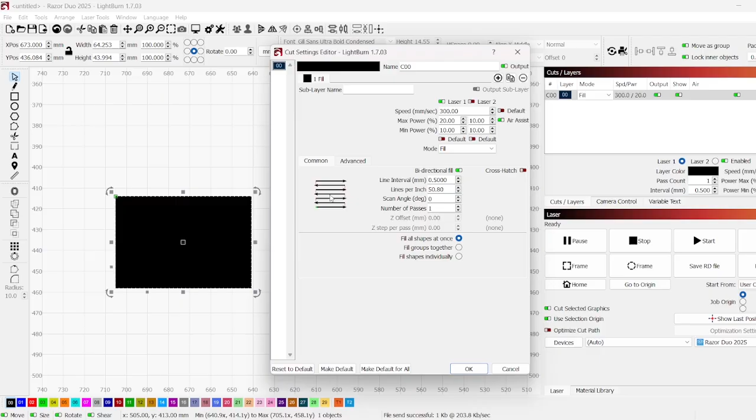So we go into LightBurn and enable bidirectional fill. That's now going to enable us to turn on our laser from right to left as well. Now you might notice that my lines don't perfectly match up—they're staggered, right? This is what happens in a real world scenario without offsets enabled or offsets that need to be adjusted.

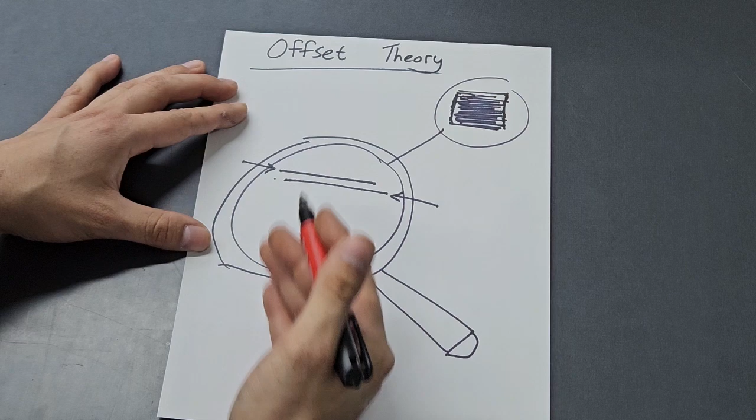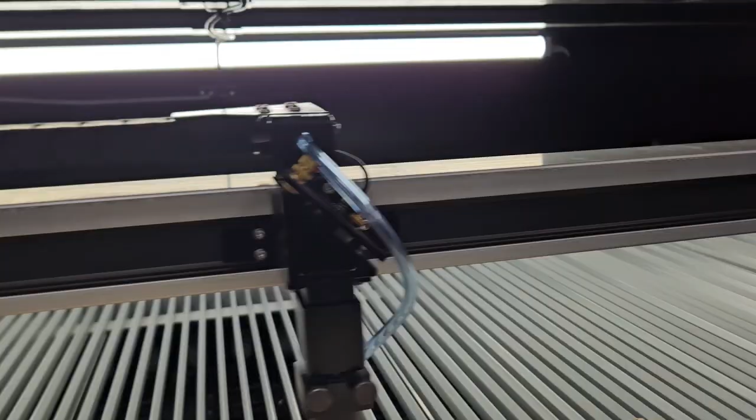So say I'm engraving this square at 1,000 millimeters per second. The gantry speeds up, it's at 1,000 millimeters per second, and then it hits my end mark, and then it has to slow down and quickly turn around as fast as possible, and then also go 1,000 millimeters per second. Acceleration, deceleration, all that back and forth on a pulley and belt system—there's going to be some mechanical lag. That's why there's going to be this offset.

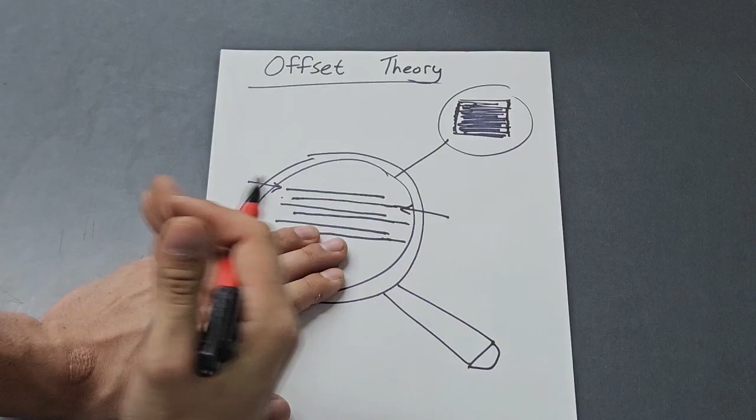This line shift, or the staggeredness of the lines, is going to be a lot more prominent at higher speeds than at lower speeds, just because the gantry doesn't have to move back and forth so quickly. Now luckily, LightBurn has a feature where you can enter an offset to get rid of this little distance between those lines, called our line shift.

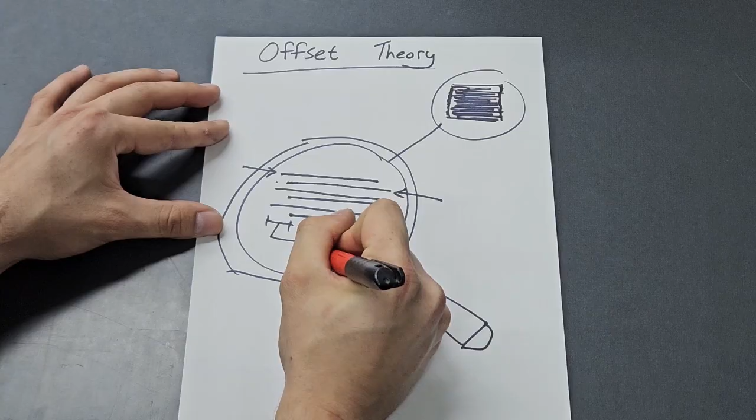That means if I enter an offset in, that's not just going to affect my right to left, it's going to affect my left to right line as well. They're both going to shift at the same time. Now that can be troublesome if you just enter numbers and everything moves around. Just remember that offset you put in for your line shift is going to affect both lines.

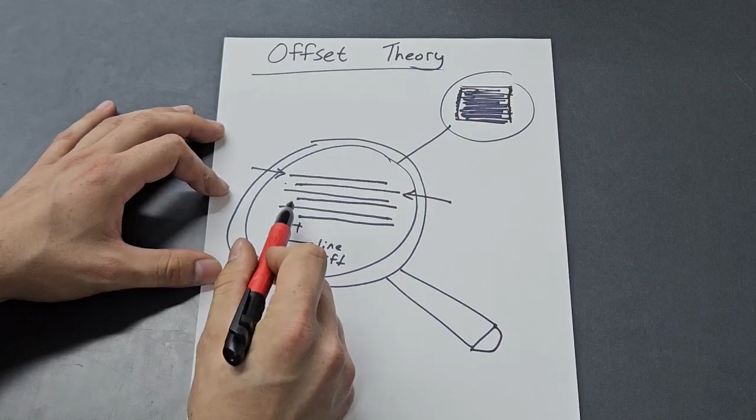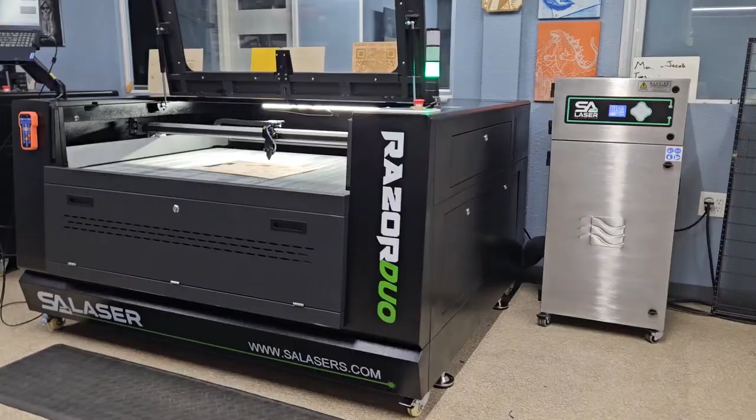The machine we'll be using today is our Razor Duo, which has the dual sources, glass tube and RF, in case we want to swap over to the RF with a much smaller dot size and get really fine engravings. The method I'm about to show you works with either offsets already on your computer that you just want to adjust, or no offsets at all, and we're going to start from fresh.

To even get to offsets in LightBurn, you want to navigate up to the top and click your device settings. That's going to be the wrench and screwdriver icon. It's going to be under basic settings and right down in the bottom left hand corner.

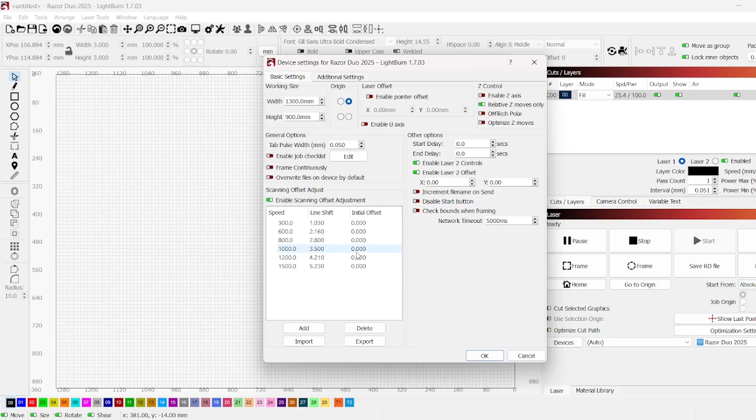Now I'm doing this in LightBurn 1.7.03. LightBurn 2.0 and beyond looks a little bit different with the ability to put in an offset for two lasers, so that works perfectly for a machine like us with those two laser sources that need different offsets, because one fires a whole lot faster than the other. So like I said before, I work better when there aren't any offsets at all and I can set it up however I want.

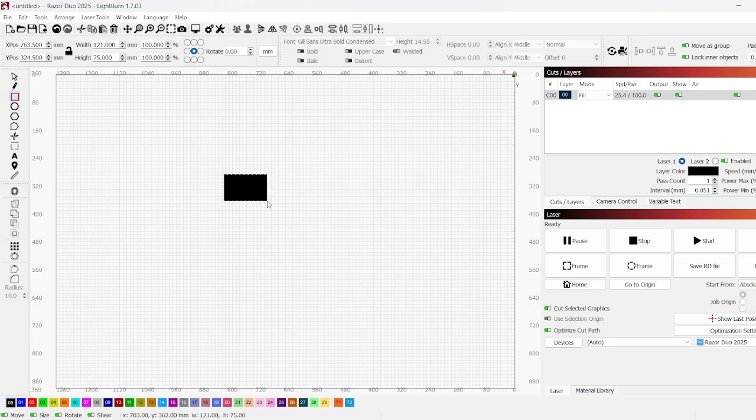So I'm going to go ahead and delete my current existing offsets, and we're going to start fresh. We're going to exit out of this and make a little square. We'll make sure that square is in fill mode, go into that layer, and change the line interval to something like 0.5. That's going to increase our spacing between lines significantly, so it makes the measurements a lot easier to take.

Now I'm going to run this on a 130 watt glass tube, so adjust your power accordingly. The speed you're going to put in is the speed for the offset you want to adjust. If you have an existing offset, say 600, put 600 in, take measurements and adjust that. But if you don't have an offset, select whatever speed you most commonly use for your engraving work. For example, a lot of people engrave tumbler cups at 550 millimeters per second, so for fine tuning that exact speed, you'd put in 550 millimeters per second.

Now let's say I do a lot of engravings on this specific type of wood at 300 millimeters per second. Since I do that speed so commonly, I'm going to adjust my offset specifically at that speed. We'll throw in 300. All right, let's go ahead and frame and engrave.

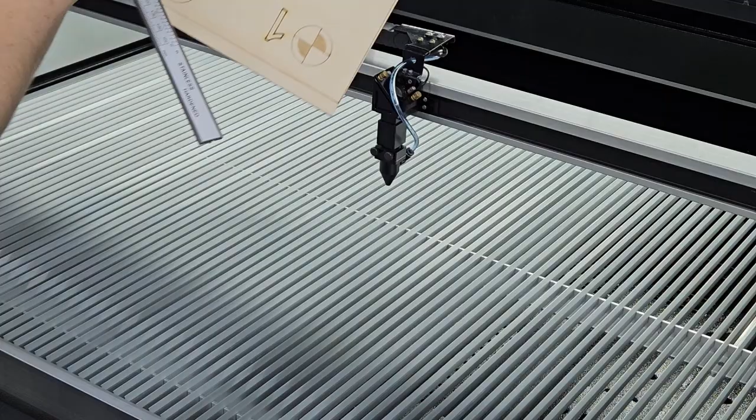Perfect. Now that it's done engraving, what we want to do is specifically look at those lines. Look, they are staggered like what we covered in our theory. Perfect, that's what we want.

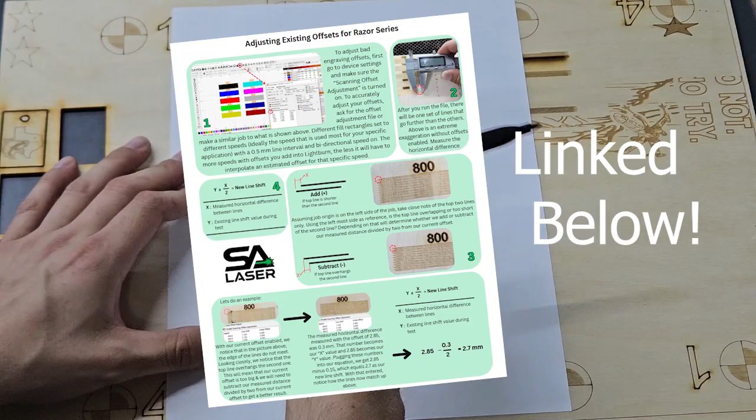Sorry, another illustration, but there will be a much prettier version of what I'm going to cover down in the description on a downloadable PDF. Okay, so this is the gist of everything to do with offsets. Either you have to adjust your offsets because there's a staggered line, or we just shut them off completely or deleted them and we're starting fresh.

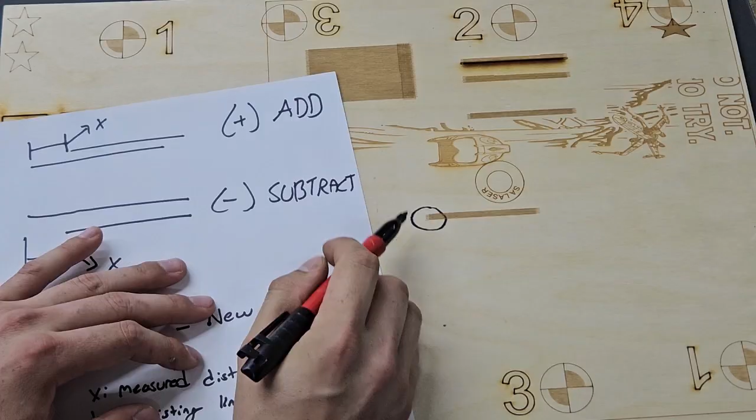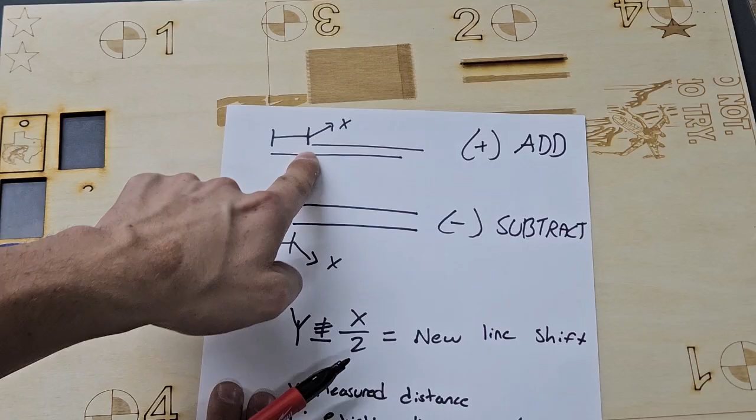Now, what I just did right here, there are some staggered lines. All we're looking at is the first top two staggered lines, and it's going to look something like this. Those top two staggered lines, either the top one is going to be way off to the right, or it's going to be covering the bottom line like this. It's either going to be a roof or it's going to be a stair step, right?

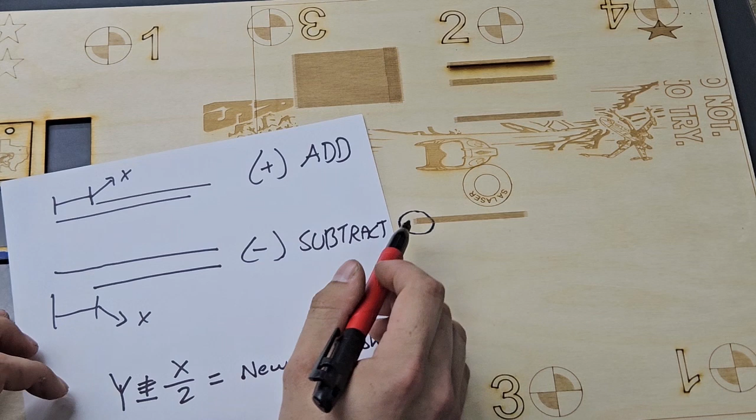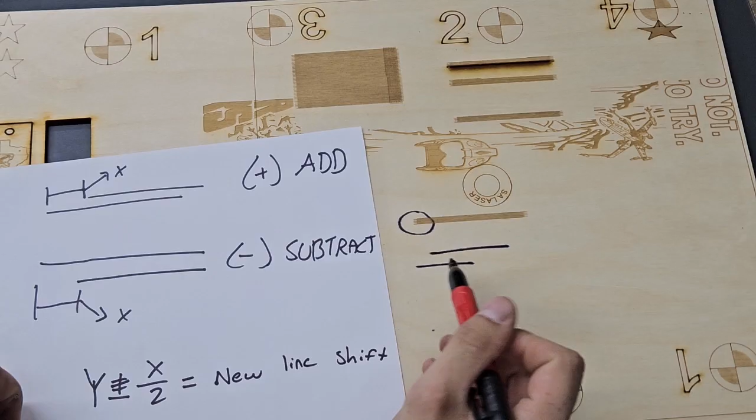Now, in my case, since I turned the offsets off, it's going to be a little stair step, and I'll draw a much bigger example here. This is what my first top two lines look like. So since my top two lines look like a stair step, the top line is off to the right, bottom line is off to the left. That closely resembles my stair step, not my roof where the top line is over on the left-hand side.

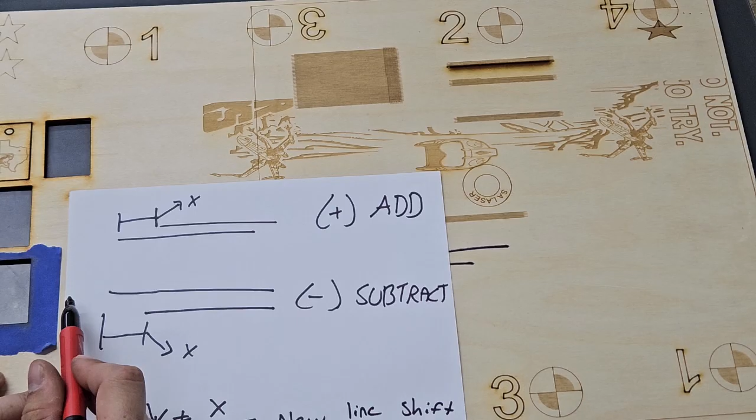So what we're going to want to do is add. Now keep that in the back of your head. We're going to go down here to our equation. It's going to be y plus or minus x divided by 2, and that's going to be our new line shift. Now, y is the existing line shift, so for those of you who have an existing offset you want to adjust, this is where that comes into play. It might be 1 point blah, blah, blah. We're going to either add if it looks like the stair step, or subtract if it looks like the roof. Add or subtract x divided by 2.

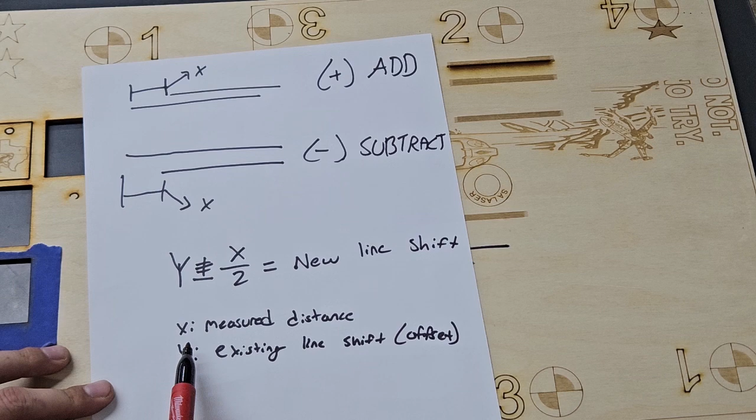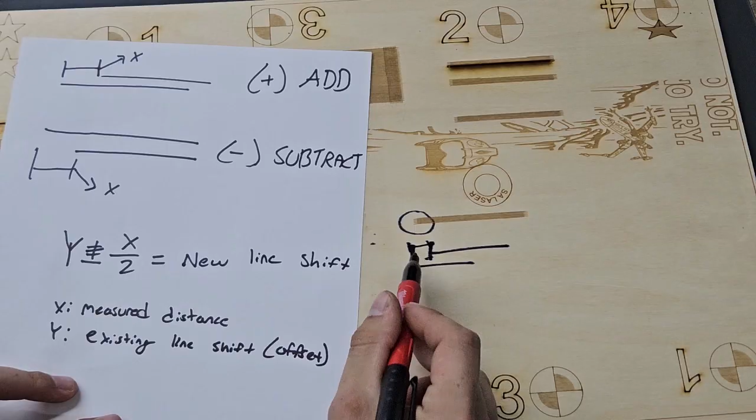X is going to be that measured distance. So we're going to get some calipers or a really small ruler and measure that distance. We're looking at the horizontal distance from here to there. That measurement we're going to divide by 2 and either add for stair step or subtract for roof, and that will be our new line shift that we'll enter into Lightburn, and then we'll redo our results and see what we get.

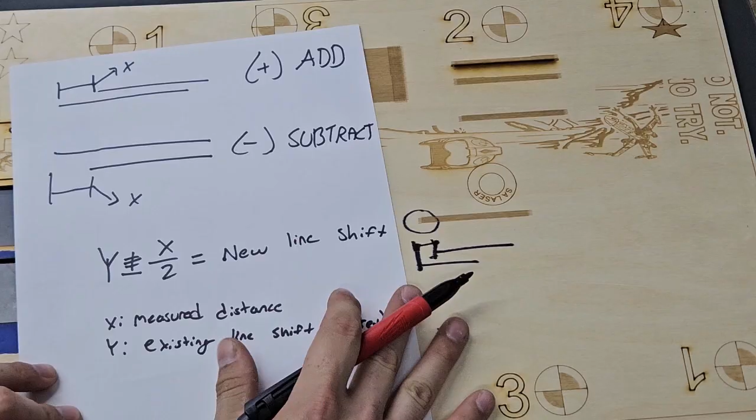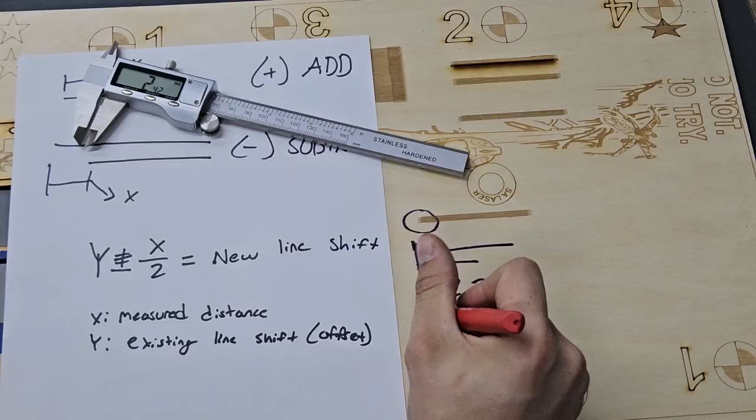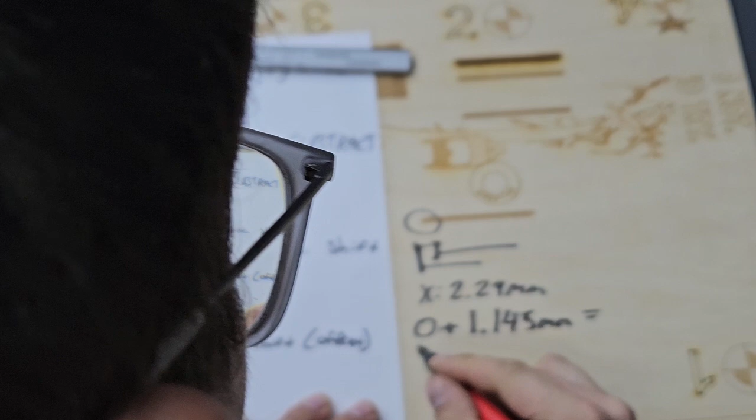Okay, so my X is going to be 2.29 millimeters. Now looking at our equation, our Y is going to be 0 because I deleted our offsets. Plus, right, because I have to add, my top two lines look like a staircase. We're going to add 2.29 divided by 2. I had to throw that in the calculator real quick, which is going to be 1.145 millimeters, to a grand total of, well, that plus 0 is just going to be our 1.145 millimeter offset. Let's go ahead and plug this into Lightburn and then redo that same exact test right next to it and compare the difference.

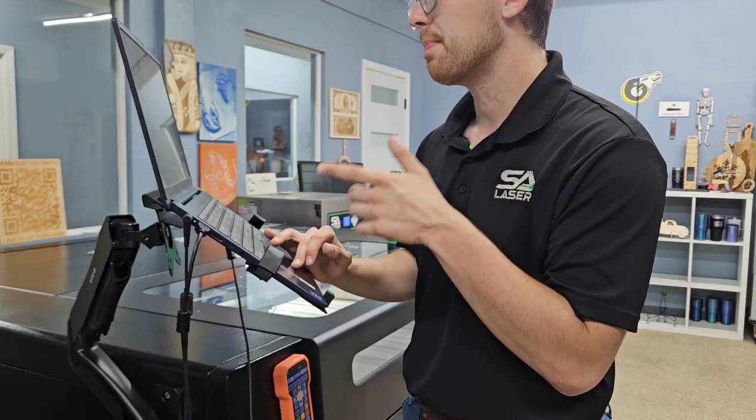Now, if you're unfamiliar with inputting offsets into Lightburn, let's walk through it. We're going to go, once again, device settings up at the top, basic settings, and then our bottom left-hand corner. Now, I did it without offsets in there, so just make sure that enable scanning offset adjustment is on for when we test it again. We're going to come down here to add. This is how we add it in.

Now, I just did my offset test at 300 millimeters per second because that's what I'm going to be running most of my stuff at. So let's go ahead and put 300 in, and then my line shift is what we calculated to be 1.145. We're gonna hit okay, awesome.

And if I want this offset in another machine, so more so if you have like 5 different offsets, all you have to do is hit export. It's going to save it as a Lightburn offset file, and then you can import it into your other computer without having to retype all those numbers over and over again if you have a bunch of them.

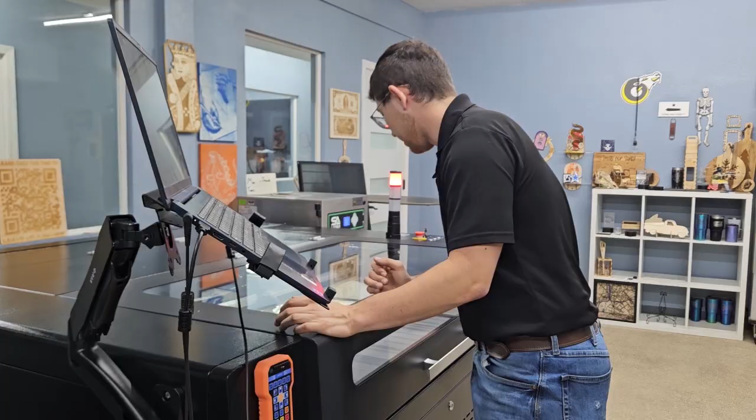We'll hit OK, and then let's go ahead and redo that test. Oh yeah, okay, so that looks significantly better all the way from over here.

Cool, so we reran that test, and if you look really closely, you can see that it's still a little bit off, and the reason being, I did that out of focus. Make sure you are in focus, but since we were out of focus originally, our number is going to be a little bit off. So now I can go through what would happen if you did the measurement and it wasn't correct, or it still has jagged lines. How would you adjust that?

We're going to do the same exact thing, and then we're going to go into the offsets again and just change that number. And that's the whole process of just adjusting from existing offsets.

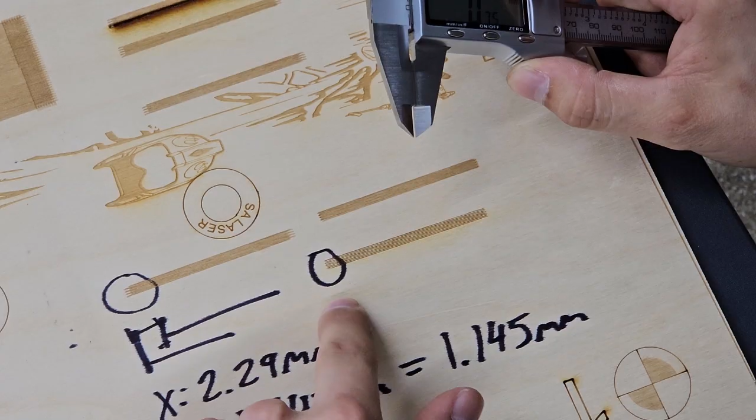Now we're going to do the same exact thing we did before. However, this is why I usually opt to turn my offsets off or just completely get rid of them, because these lines are significantly harder to line up or see. And of course, you could also increase your spacing between each line. It doesn't matter, I just use 0.5 line interval as an example. You can make that much bigger if needed.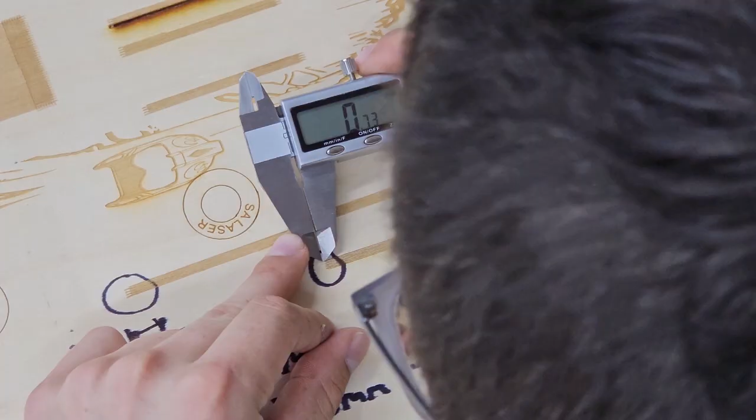But now I'm going to try and do my best to measure this X, my horizontal line, which is going to be about 0.7 millimeters. So just like we had before, my X is going to be 0.73 millimeters. Cool. So we're going to use our Y. Our Y is going to be 1.145, and we're going to look at those top two lines.

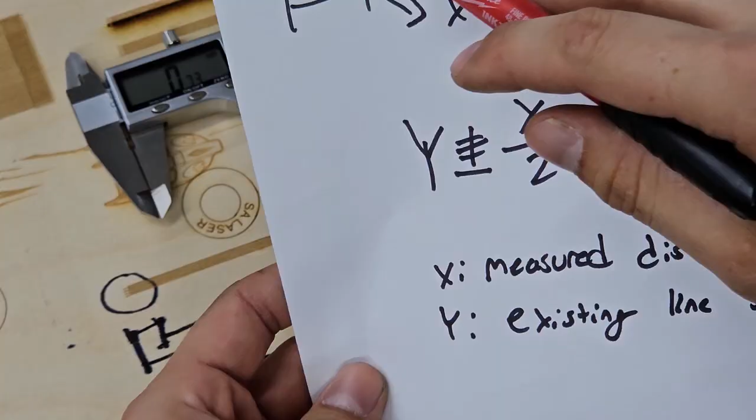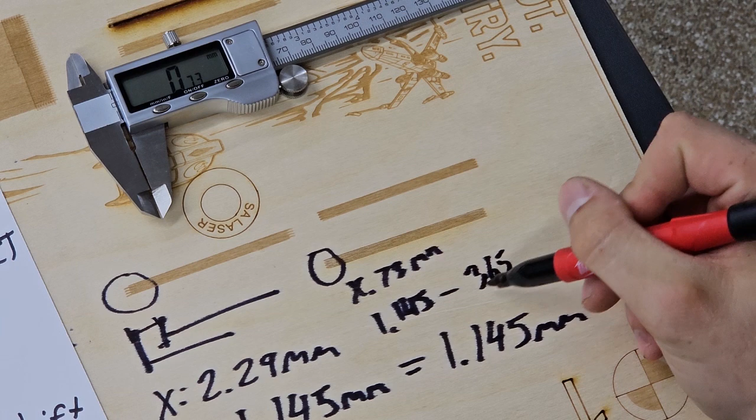Now we're going to want to look at our little handy dandy chart. Is this a roof, or a staircase? And it's actually a roof. The top line is going to be overhanging far over to the left, so we're going to want to subtract. So it's going to be 1.145 minus 0.73 divided by 2, which is going to be 365. Total of 0.78. With it back in, let's go ahead and adjust the offsets.

We're going to go back into device settings. We're going to go down to the bottom to that 300 that we just did, 300, 1.145. We know that that's a little bit too big. We're going to decrease it to 0.78 and hit OK. And that's all it takes to just adjust your offsets. That easy. We're going to go ahead and frame and then redo the line.

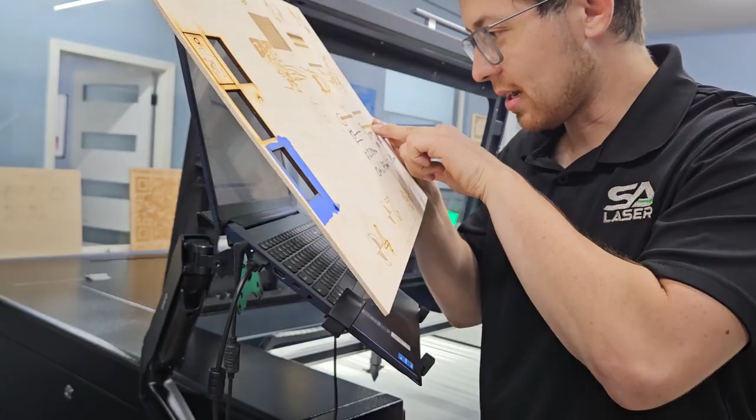And then this is where the scary part happens. It gets really hard to tell. Once the lines are right on top of each other, it's really hard to tell if they're off at all or if your eyes are just playing tricks on you. So this is up to user discretion. You can keep trying to go back and forth and adjust it even more if need be, but once it's right on top of each other, that's pretty good.

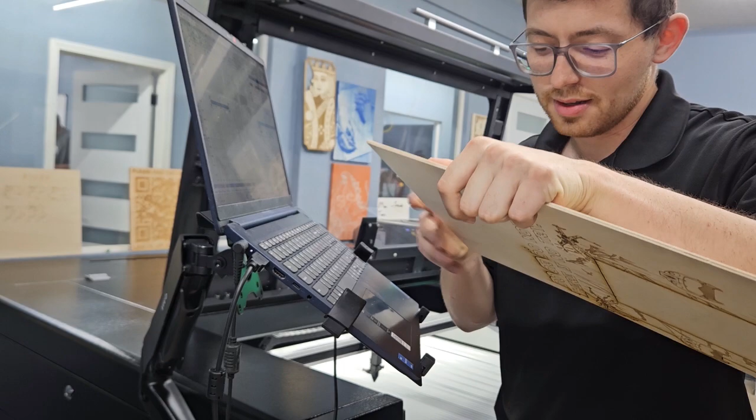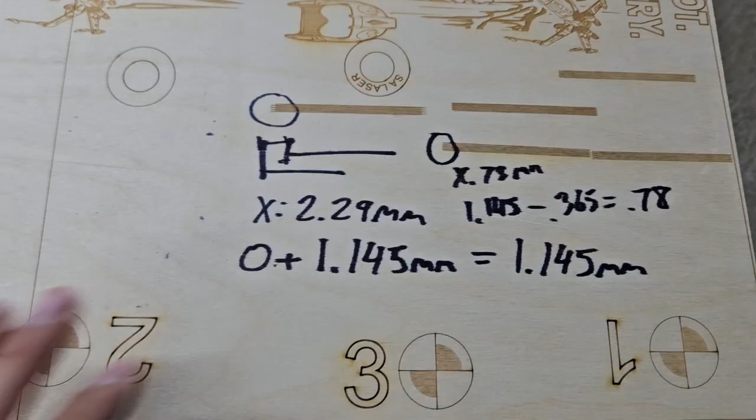So just an overall recap, we started out with lines looking like that with no offsets, right? And then we ended up with something like this, where the lines are right on top of each other, and that looks like a pretty good offset, all from that little equation of y plus or minus x divided by 2, and that'd be your new line shift.

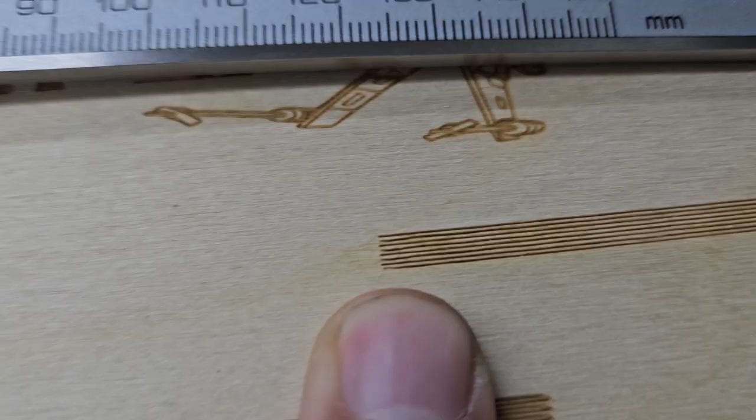The tricky part is measuring exactly the points, the start and end. That's what can throw you off. If needed, just keep going back and forth. It may take a few tries. As you can see, it definitely took me a few tries, and you'll eventually get to that perfect line spacing that you're looking for. But it will take trial and error and some math, but that is how laser offsets are done for all gantry style machines.

Now we just walked through the 300 millimeter per second offset for this machine. Now keep in mind, all machines are going to be different in some manner. All belts are going to be different tensions, and over time, as that laser is being worked, the belt's going to stretch, and those offsets aren't going to be adequate. So over time, just make sure that your engravings are up to par. If not, either tighten the belt or just keep doing those offset adjustments to make sure that you're always on top of getting the best engravings possible.